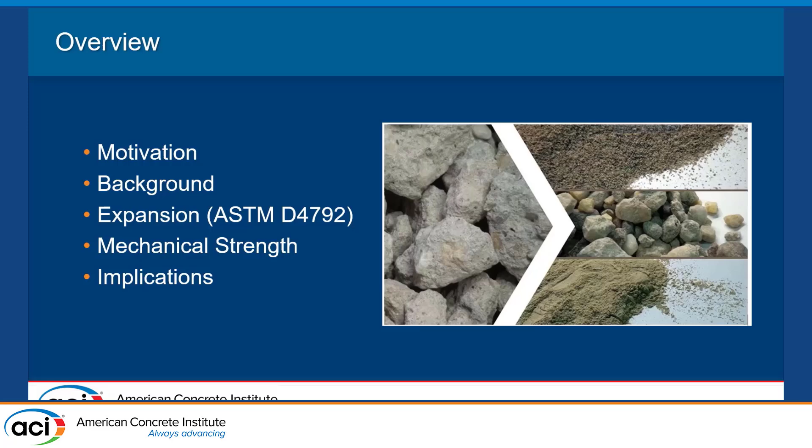So electric arc furnace, or EAF slag, is a rock-like material that forms as a byproduct of the steel recycling process. And more than 10 million tons of this material are produced in the United States per year. And unlike blast furnace slag, which is commonly used as a supplementary cementitious material, the majority of EAF slag ends up as waste, and it will cost steel manufacturers anywhere from $60 to $80 per ton to dispose of this material. And this is both economically inefficient and poses a sustainability issue.

If the EAF slag is able to be applied as a supplementary coarse aggregate, not only will this reduce the disposal costs and the landfill burdens, but it may also have effects that improve various concrete properties.

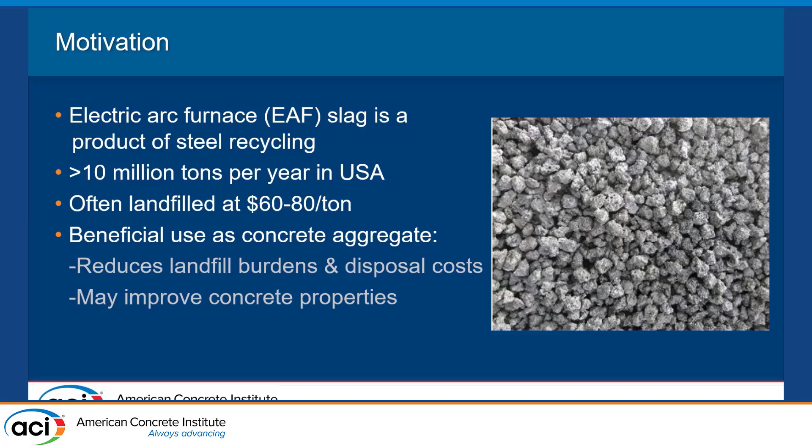So the main concern regarding the application of EAF slag as a coarse aggregate is its potential for expansion due to the hydration of the free calcium oxide and free magnesium oxide that make up a large percentage of the EAF slag's composition. While hydration is, of course, a fundamental reaction in cement chemistry, if too much expansion of the aggregates results, it could lead to tensile stresses on the concrete, leading to undesirable cracking, which, of course, can affect the structural integrity of our concrete mixes. Therefore, we found that the replacement levels end up being limited mainly by this expansion.

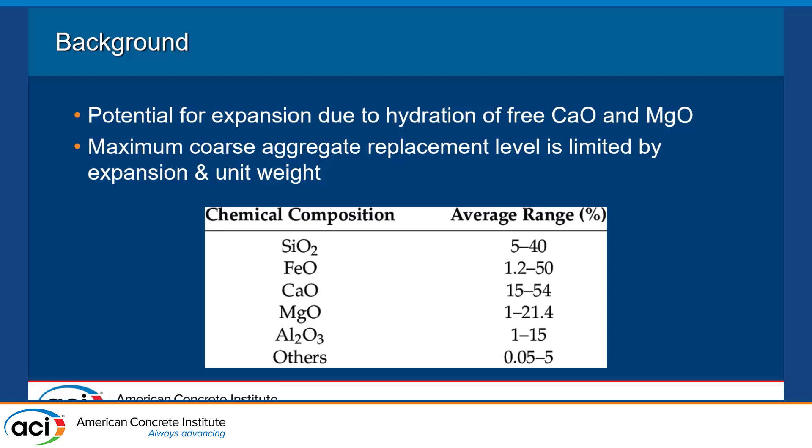So the main tests that were completed during this research were ASTM D4792, which is the standard test method for the potential expansion of aggregates from hydration reactions. And this test measures the volume expansion of dense graded compacted aggregates. Samples for this test were prepared using a modified California bearing ratio test, which had to be modified for use with coarse aggregate as opposed to the traditional finer soils. This test was performed on samples of 100% traditional limestone coarse aggregate, as well as samples of limestone aggregate supplemented with 10, 20, 30, and 40% electric arc furnace slag by volume.

On the right, you can see a photo of the final experimental setup with the compacted aggregates under a surcharge weight of 10 pounds, and the dial gauge is how we measured the expansion of the aggregate. These samples were kept submerged in water at 70 degrees Celsius for the week-long duration of the test. And expansion readings were recorded daily at approximately the same time.

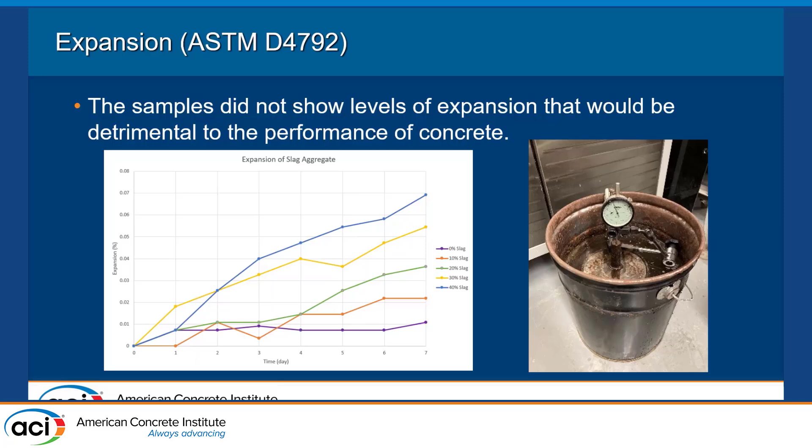And on the graph on the left, you can see the expansion over the duration of the test for the 5 mixes. And as expected, we saw the aggregate expand as the test went on, more so as we increased the replacement level of the slag. But as you can see, our expansion over 7 days did not go above 0.07%. And according to the majority of literature, the limit on aggregate expansion in concrete ranges from 0.08% to 0.1%. So this falls even at the replacement level of 40% below this threshold, meaning it could be a viable supplementary coarse aggregate.

So we also looked at some mechanical properties of concrete with the use of the slag aggregate. We did these tests with a base mix with traditional limestone aggregate, as well as mixes with 30% and 40% replacement, as the higher replacements would be the best economically and sustainably. So we saw that there were small changes in the compressive strength of the EAF slag aggregate concrete, as well as a decrease in the modulus of elasticity, which is hypothesized to be due to the more porous nature of the EAF slag when compared to traditional limestone aggregate.

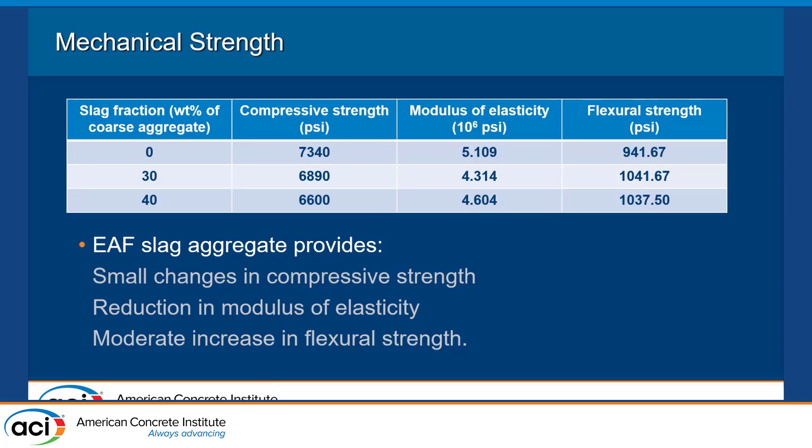And from this testing, we wondered if this decrease in modulus of elasticity may cause a decrease in flexural strength, which of course would mean that the material does not have any positive impacts on concrete. So we performed flexural strength tests. We did simple beam tests with center loading to test our flexural strength, and we actually found that there is a moderate increase in flexural strength in the beams using EAF slag aggregate, which was a very interesting development.

And then just to briefly discuss how this could impact the concrete industry going forward. First of all, cost. Traditional limestone aggregate is often anywhere from $10 to $50 per ton, which of course may vary based on location, demand, and availability of the aggregates. While EAF slag will cost anywhere from $5 to $10 per ton to be used as coarse aggregate, which of course is a decrease in cost.

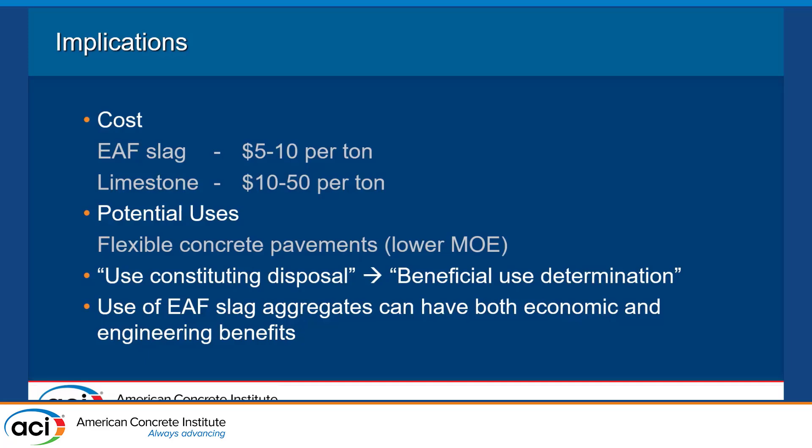And as for potential uses, we believe the main application of electric arc furnace slag aggregates could be in more flexible concrete pavements due to the previously mentioned lower modulus of elasticity, which could allow for concrete pavements to be used more in areas where freeze-thaw damage is more of an issue, which the added flexibility will help with. And as well, using this material as a coarse aggregate will introduce a use for it that is meaningful and has positive impacts and is not just being disposed of and creating environmental issues. And overall, these slag aggregates can have both economic and engineering benefits to our concrete industry.